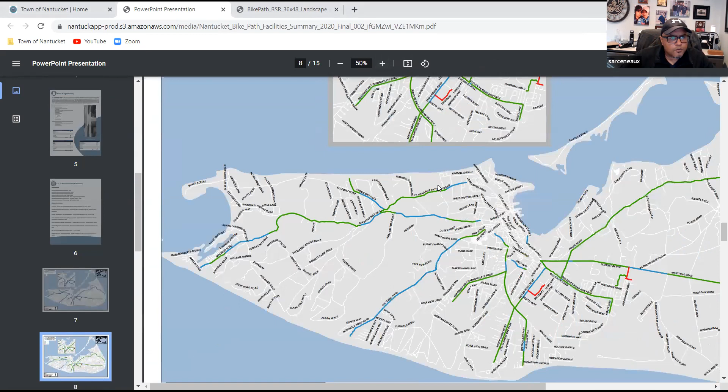This is all the bells and whistles approach. If we had this for the roads and the sidewalks - if you go to page 12, it'll give you the list similar to the RSR report for the roads, as far as the listings. We go by order of priority, and the bike paths are a little easier to address because we address them as an entire system. The roads are a bit more expensive, so we have to be careful with our spending there, but we can address these as a whole to some degree.

Thank you. Stephen, just on the information and presentation - as I said, the capital program committee, I think we can work fairly well with this information here in spreadsheet form. You mentioned improving communications with the community. Is this type of report what the vendor will be doing when they come back to update, or will it be more just costs and less presentation?

No, we've addressed that as well. We're going to have a plan for our rights of way, and there will be a presentation. There will be a community-friendly version of this to post on our website, that's also part of it. The community itself doesn't need all these numbers, they just want to know what's being done, when we're doing it, and to address any conflicts. So we will have that as well.

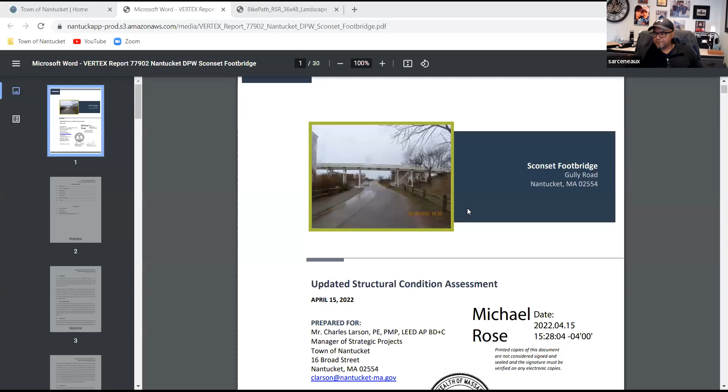So it's $100,000 supplemental from an FY20 request, which I think was about the same amount of money. You guys have any questions or comments on that?

Other than, obviously, if it's a life safety thing, we ask please reflect that and we can act accordingly.

Stephen, on that one, my personal belief is there was a request put in at FY20 - none of this is reflective on you or anyone really - and now we're going to do a supplemental. I'm of the mind that let's do it once, right? It's never going to get cheaper, and it's something that is highly utilized by the public. It's very visible, so on and so forth. So just to support that.

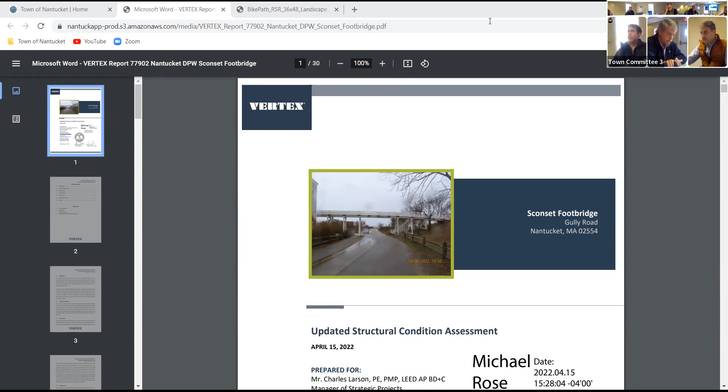So Stephen, if you had any comments on that, great. And then we're gonna - oh, no, I'm good. Thank you. And then was there anything on out years in particular that sticks out in your mind that you'd want us to know about at this point?

No, nothing right now. I'm just - DPW, we're still in that recoup and recover mode and refocusing, but there will be more structure and more information coming. So thank you for your patience. Okay, thank you. Any closing questions?

I have one question - Christie. Stephen, does the Sconset footbridge include painting? I have to talk to Chuck, I don't know that offhand. I'm sure it does, if it doesn't we could cover painting. We're worried about the structural integrity, having it properly assessed and reinforced, but whether it includes painting or not, we will paint it.

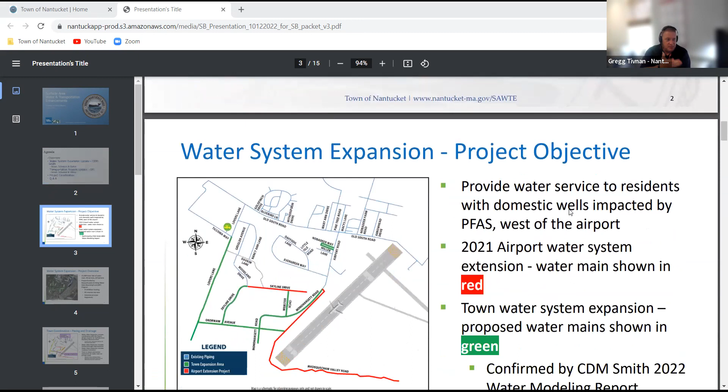The water main expansion project is separate from the Lover's Lane roadway project in Okorwaw and Monohansett. It's a voluntary effort regarding the town's PFAS response, looking at PFAS in the area, because instances of PFAS were found in private wells there due to the airport's PFAS response required by the state. We felt it prudent, since the water main was already being expanded down Airport Road and a little into Monohansett, that we could jump onto that.

We did apply for a state revolving fund loan, and our project was selected at $7.8 million, with a request for an increase to $8.3 million, a no-interest loan in order to do this project. The water main project affects Lover's Lane, Okorwaw, Monohansett, in addition to Skyline, Webster, and Nobadeer Way. So what you have before you today is a request for $13 million for the roadway projects.

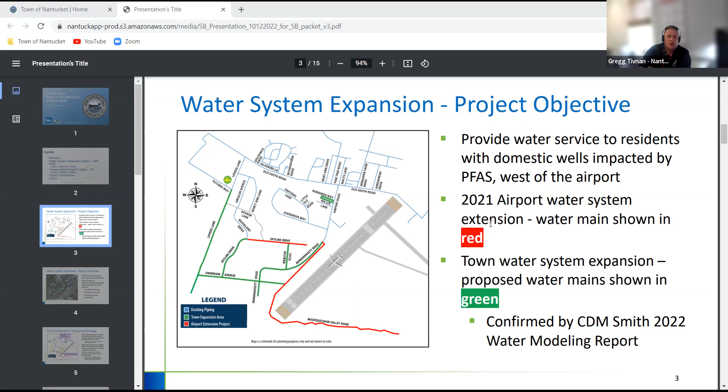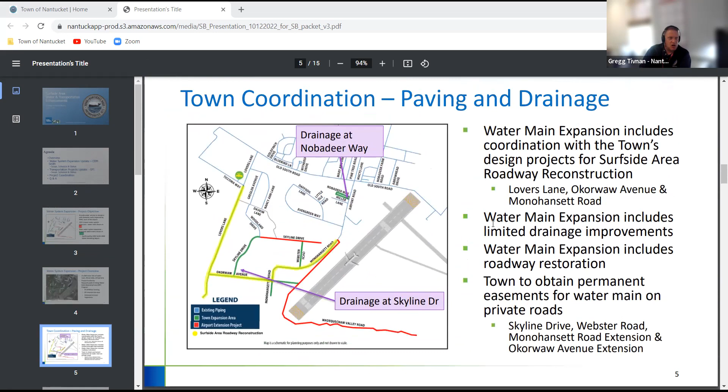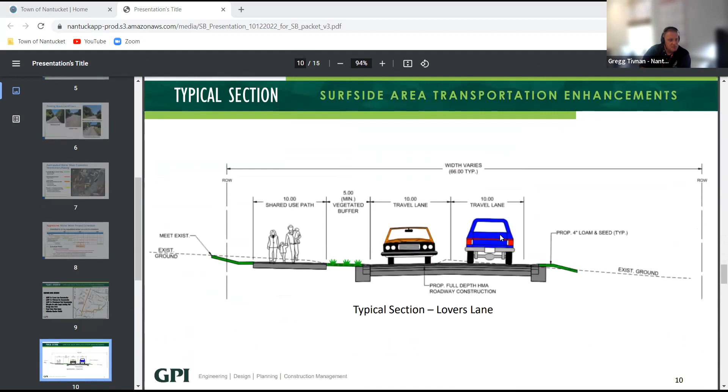Brian, if you want to go up, there's a chart, on page 8 a little further up. This one right here, Greg, that works. There's a chart with the actual estimates from GPI, on page 11 or 12.

The reason why I'm involved is that we've created a working group with one major overall project management office for this entire area workload, so that we are not redundant, repeating efforts and costing more money.

Our intent with this request is that once the water main project is implemented and completed—which is on a faster track because of the SRF state funding requirements and must start by fall of next year unless we get waivers—since we have the roads open, we would like to start these projects with Lover's Lane, then continue to Okorwaw, and then up to Monohansett.

As you can see from the square footage, we'll reconstruct the roadways, provide better engineered drainage, and put in a 10-foot wide multi-use path—they're now called side paths, that's the more proper vernacular these days. That would connect Old South all the way down to Surfside, all the way to the airport.

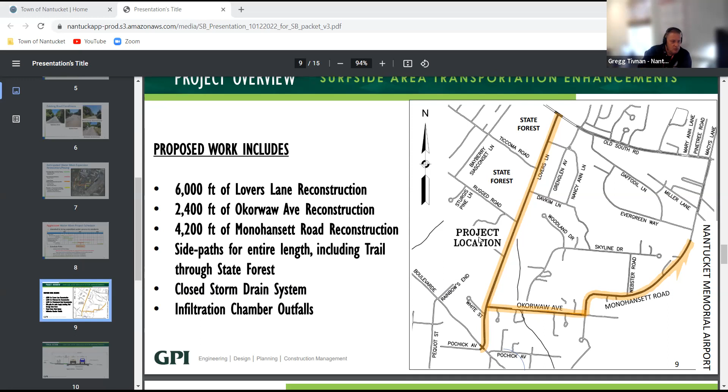So Lover's Lane is further along. It's already pretty far along with permitting with the state forest, permitting for natural heritage, all that other stuff. We would still need supplemental funding to complete Lovers. Brian, if you wanted to go a couple slides down—there you go, thank you.

This is the supplemental funding that we require for Lovers, Okorwaw, and Monohansett to complete all of the projects. So with the $3 million remaining, we have a $13 million request.

Now, if this doesn't happen, or if it gets to town meeting and it's not approved, the worst case scenario is that the water main project still happens—that's already approved as state funding. At last year's town meeting, the voters approved $9 million in funding and borrowing, also approved at ballot question number 13 last year. So we have the funding in place for the water; that is going to happen.

What would happen though is it would just be trench paved after the project is completed, because the SRF loan does not allow municipalities to improve and expand roadways—you can only go back to what it originally was. So we're trying to avoid any trench paving that may sit there for 2 or 3 years, but that'd be the worst case scenario.

The best case is that the money is approved and we already have two engineering firms, GPI Incorporated and CDM Smith, working side by side to design all the utilities, as well as the road reconstruction, drainage, and bike path to connect all the way up through Monohansett. So I've said a lot, I'm sorry—if there's any questions.

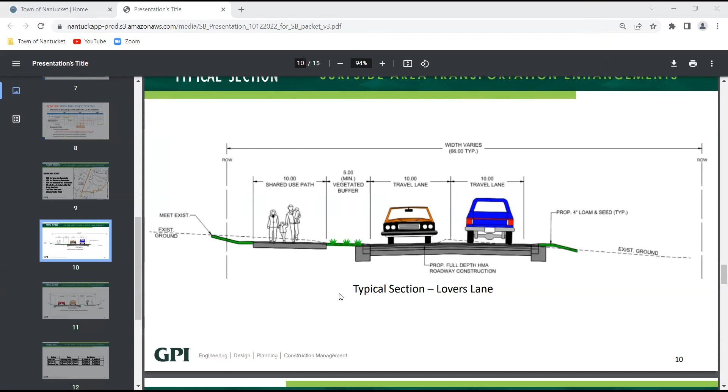Hi Greg, sorry, can you go back - I understand what you're doing on Lovers, but can you go back to Okorwaw and Monohansett and explain what side of the road the bike path is on? Someone had mentioned earlier that you were looking at putting the bike path in the road, kind of like you've done on Orange Street. And it looks to me like you're going into people's property, so I'm trying to understand that better.

Correct. So what Brian has up right now, slide 11, is actually what Okorwaw would be. Going from Lovers towards Monohansett, the bike path would be on the south side, the right side, not in the road. There'd be a vegetated buffer. My understanding is that most of that layout is in the public way. It just so happens that much of the utility in that roadway is already under where the bike path would be. So not 100% sure, but we are engaged in getting easements, voluntary easements, or any sort of takings.

I do not recall any on Okorwaw. Similarly, going up Monohansett, the bike path will be on the right, on the airport side, the east side. And it's very interesting because even though it's public property, it's airport property, so we still have to do an easement with the airport, which Ken Bogran is already involved with. And it would still be a buffer.

And in the area where there may be a pinch point, Jill, where the engineers may seek to move Monohansett a little bit to the west in order to accommodate a buffer zone for the bike path, there would be the need for a small taking right at, I believe, Webster. But that's not even completely designed yet. Aside from that, there's no other private property takings or anything.

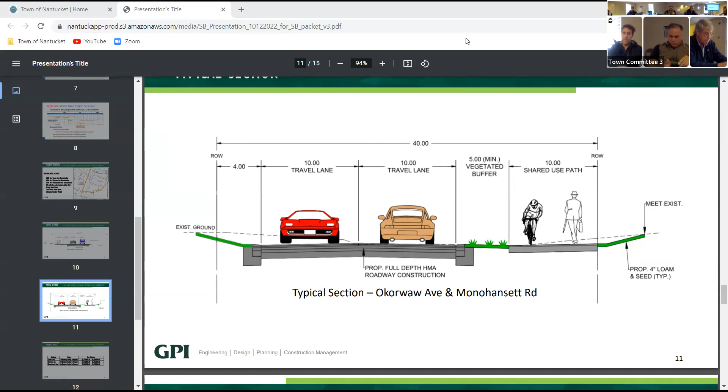Report writing, anything from Plum? Sue reached out to them to find out Bill's availability, and we're just waiting to hear back from him. Okay, we should have better information for you next week. Was that PDF I provided helpful? Everything that you've provided so far has been helpful. Thank you, appreciate that. Good answer. Very well, very polished too.